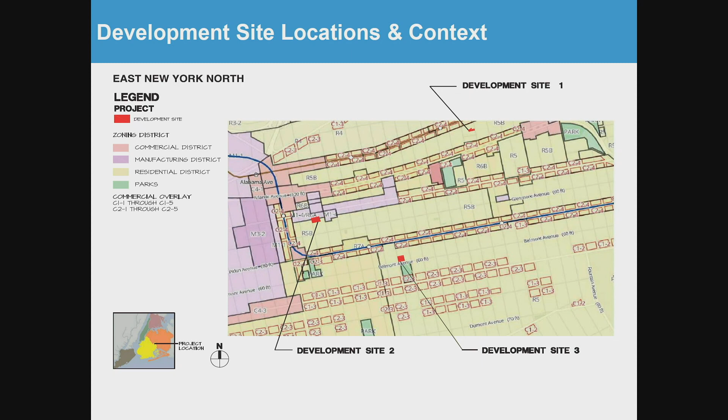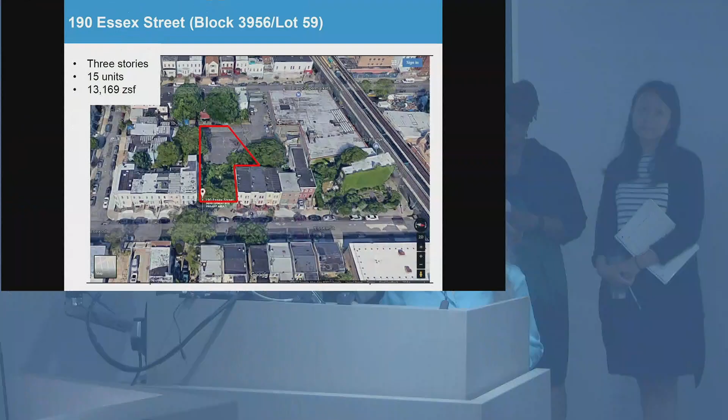This is an aerial view of the first site at 190 Essex, at Fulton Street, and we would build 15 units in a 3-story building. The zoning area is just over 13,000 square feet.

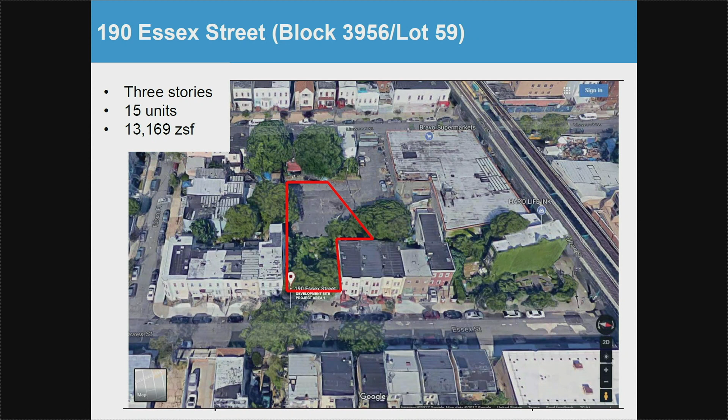This is our site plan, and you'll see that there's a backyard area for resident use and 2 courtyards that will allow for nice plantings, and the backyard will be reserved for resident use.

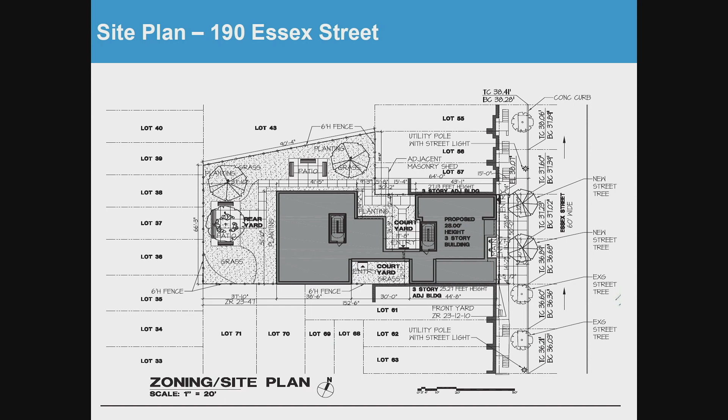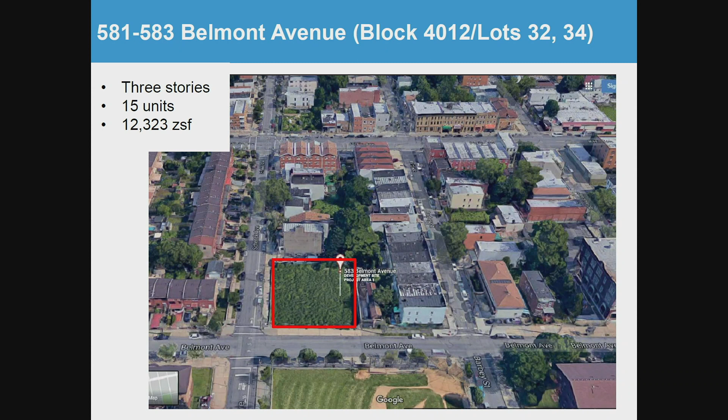The next site is at 581 Belmont, at the corner of Schenck. Also a 3-story building, 15 units, and just over 12,000 zoning square feet. Here's our aerial view. We're proposing 8 one-bedroom and 8 two-bedroom units.

Here's our rendering. You'll see it's set back a bit from the street with some planting areas and a ramp up to the main entrance, which is on Belmont.

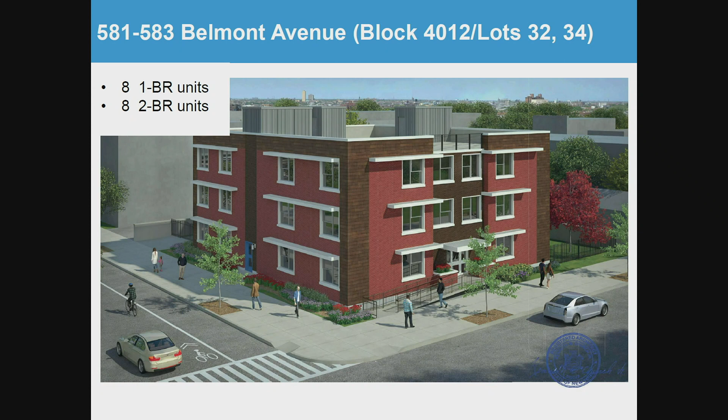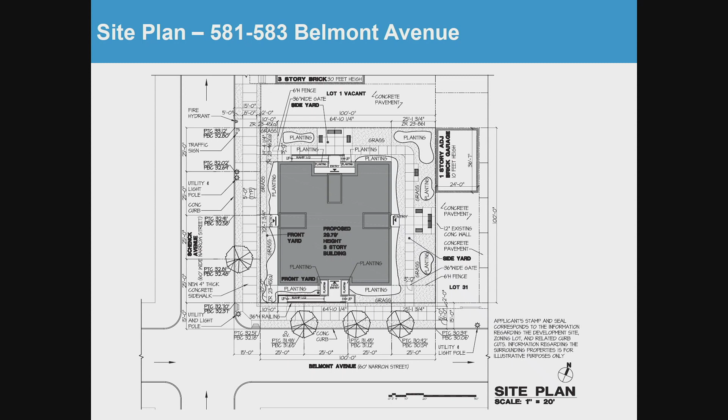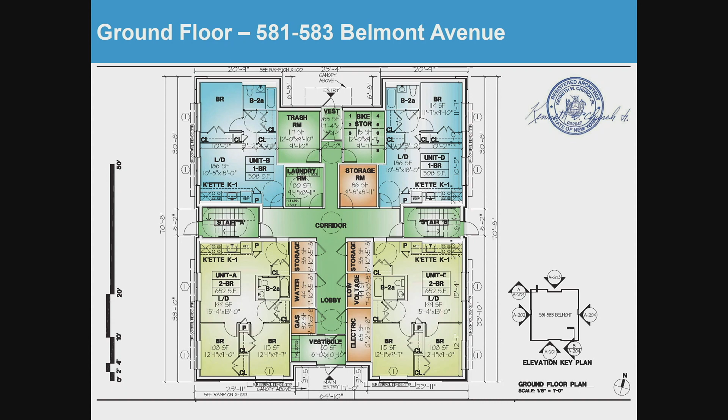Again, the main entrance you'll see is off Belmont, and then there's access to the backyard through a separate entrance at the north end of the building.

The third site is on Vermont Street between Liberty and Glenmore. This is the aerial view: 11 units and just over 10,000 square feet of zoning floor area.

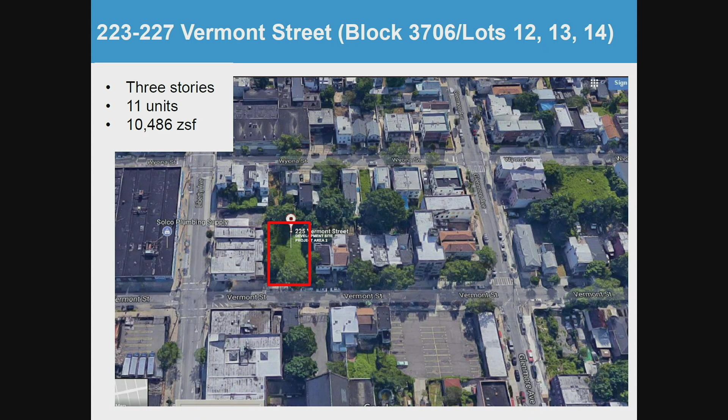This is our rendering: 5 one-bedroom units, 6 two-bedroom units, and you'll see that the building is set back a bit from the street, with some plantings in front of the building to create a bit of a buffer.

The site plan is shown here. The main entrance is on the south side of the building, through a pathway from the street, on the side of the building. There's also an entrance in the middle of the building leading back to the planting and backyard area for residents' use, where there will be plantings and so forth.

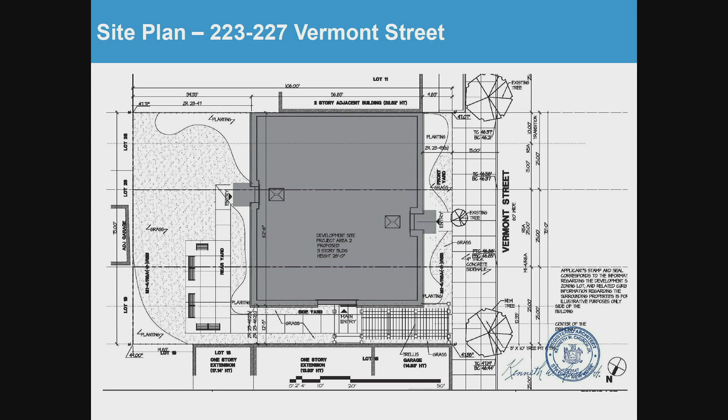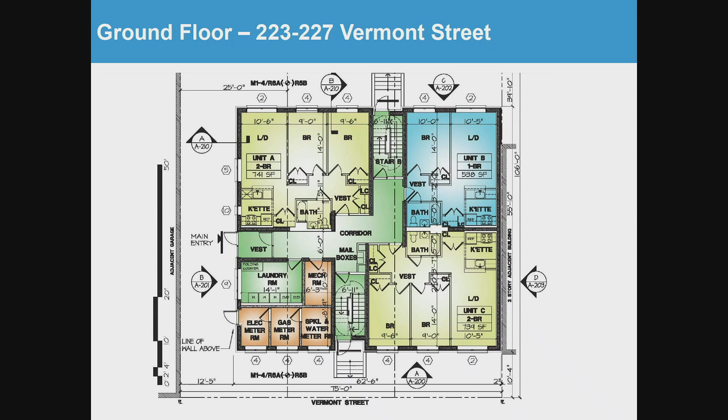Here's the ground floor. You'll see that there are utility rooms, a laundry room for residents' use, 3 residential units, and mailboxes. Again, the entry is on the side of the building, on the south side, and there's an entrance to the rear yard at the back of the building.

Our proposed program is 22 one-bedroom units, 19 two-bedroom units, plus a two-bedroom unit reserved for the super. We serve a range of incomes. All of the units will be affordable, with just over 10% set aside for homeless families, and the rest of the units will serve families between 30% and 70% of area median, with the vast majority below 60%.

The incomes range from units affordable to families at $21,000 and change up to almost $75,000 and change, from the one-bedroom unit at the low end of the affordability range up to the two-bedroom unit at the highest range. The rents start at $481 for a one-bedroom unit at the low end, up to $1,500 and change for the two-bedroom at the high end.

We're hoping for ULURP approval this summer, and assuming that's the case, we would close on the construction financing this fall and start construction straight away. We anticipate rent up and completion of construction in about 2 years. With that, our team would be pleased to take any questions from the commission.

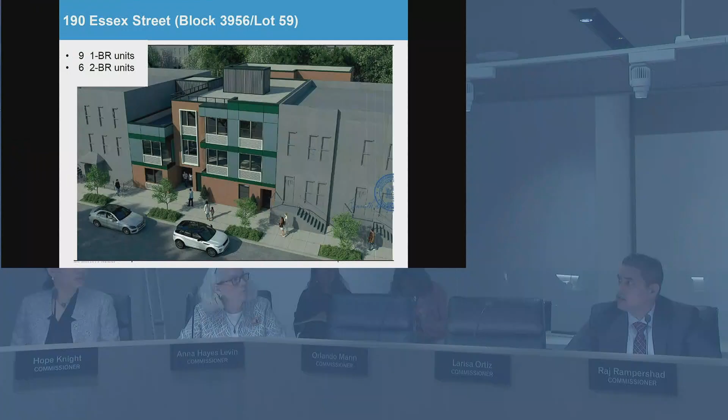I'll turn to Ken. Did you hear the question? On 190 Essex, yeah. Please introduce yourself. I'm Ken Church, the architect. That's probably just a discrepancy between the plans and the site plan that hasn't been updated. There's going to be 32 feet between the windows, so we can use that for light and air.

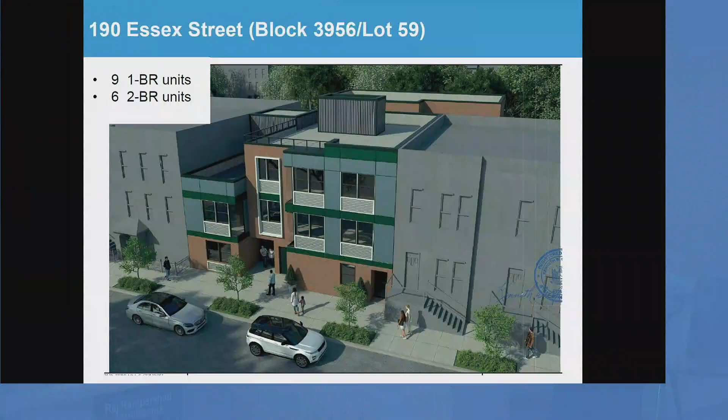One last question. On Vermont Street, on the rendering, I noticed there was no stair bulkhead. Is the stair going to go to the roof? The stair will go to the roof on both sides. Okay, the rendering just didn't show that. No problem, I'm sorry, Vermont Street got redesigned recently. There is no stair bulkhead, just a roof hatch. Because of the height limitation in that district, we weren't allowed to put a stair, so we just have a hatch from the 3rd floor.

Thank you. Commissioner Burney: Just a couple of questions for the architects. I notice, with the exception of Essex Street, the buildings are set back and have these 10-foot planting strips in front. I noticed these planting strips are never successful - they're not maintained, they die, the grass isn't maintained.

With Essex Street you've got more of a hard paving solution. I wonder whether that isn't more advisable here rather than trying to maintain grass and planting. We can integrate some hard paving into the front of those buildings. What happens is typically people like to walk on that area, and we're trying to buffer between the windows at the street level, but we can put in some hardscape. It's really not that people walk there, but their dogs poop there, you know how it is.

And second, it's not entirely clear what the facade materials are here. Anything that's colored - in this case the yellow and the blue - are insulated metal panels. It's a rain screen, and it's masonry on the bottom, brick. Most of the buildings are metal panel or brick. Belmont has a wood-looking metal panel and brick, and Essex is also metal panel and brick.

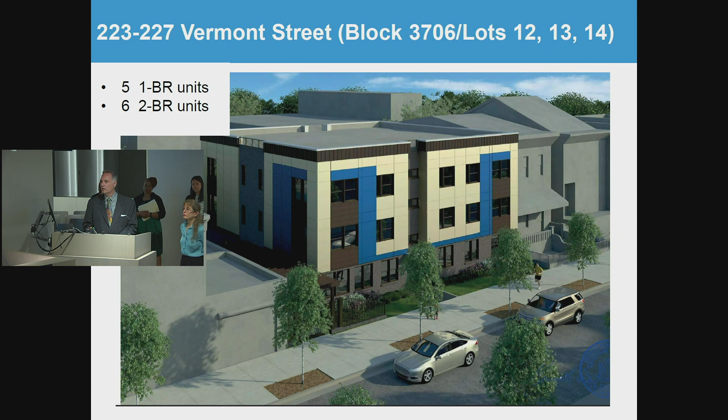So we gave them a quieter backyard experience from their windows. Commissioner: Are you concerned at all about the safety aspects of having the main entrance on the side of the building? It's kind of going down a dark alley—will it be lit? Yes, absolutely it will be lit. There'll be a gate with an access system, and of course there are cameras nowadays for everything.

Okay, and then just a development team question. I'd be interested in some background on the team—what kind of work you do, other work you've done in the neighborhood. Just introduce the people and the companies involved. Yeah, I'll answer for two of the members, and then I'll invite Sheila Bennett up, who's our third and very important member. It's always nice and informational for us to know who's working in these neighborhoods and how the landscape looks.

Absolutely. So the first team member, the Markel Group, is a developer/general contractor. They've been very active in Brooklyn, having completed two affordable projects there, as well as some market rate projects and a bunch of medical space. They've been active outside of New York City as well. And I'm with M. Lappin and Associates. We're also a managing member, and we do some development and some consulting. Prior to M. Lappin and Associates, my partner and I were with the Community Preservation Corp. Mike Lappin was president of CPC, and I was on the development side of CPC Resources.

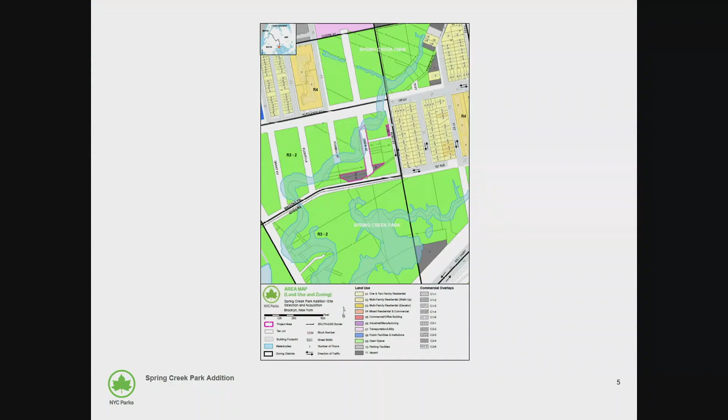This map will give you an idea of the scale of the project. Most of the slide includes the Spring Creek Ecological Restoration Project, and you can see the privately owned parcels for acquisition up in the upper right-hand corner. So with these public benefits in mind, Parks and DCAS are requesting the City Planning Commission support for this proposed action, facilitating the acquisition of unimproved, privately owned parcels to be included and preserved as part of Spring Creek Park. I'd be happy to answer any questions you have.

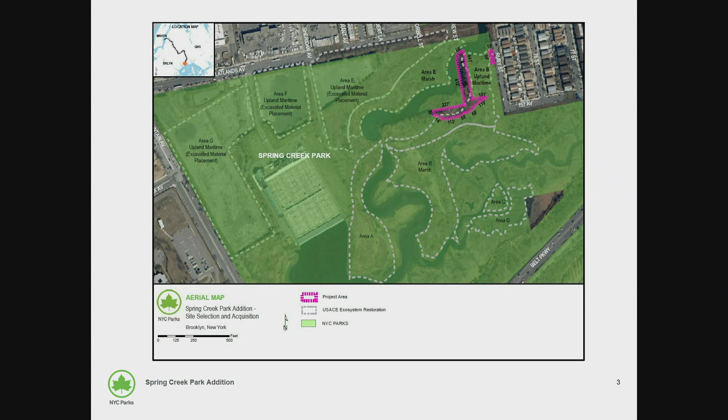Questions from the commission? Thank you, Mr. Tai. And any questions for Mr. Lopez? Okay, those are the only speakers who have signed up to speak on this item, but if anyone else is present and wants to speak, please come forward. The public hearing is closed.

Borough of Queens, numbers 22 and 23, Kew Gardens Hills rezoning, CD8. Number 22, C190299 ZMQ. Number 23, N190301 ZRQ. Public hearing in the matter of applications for zoning map and zoning text amendments concerning Kew Gardens Hills rezoning.

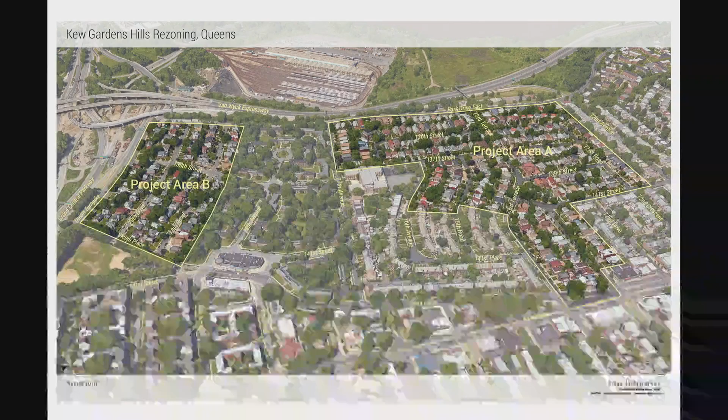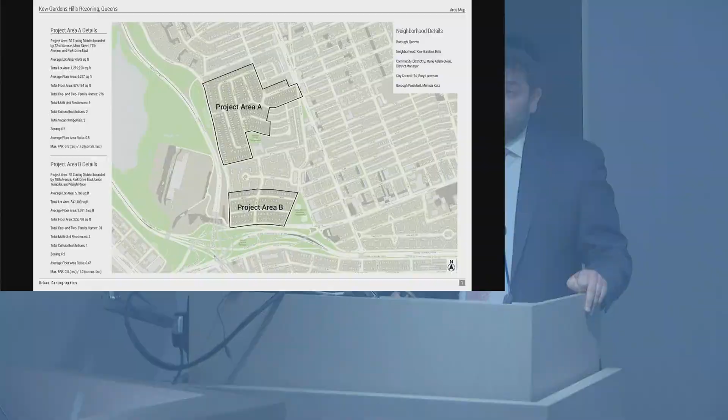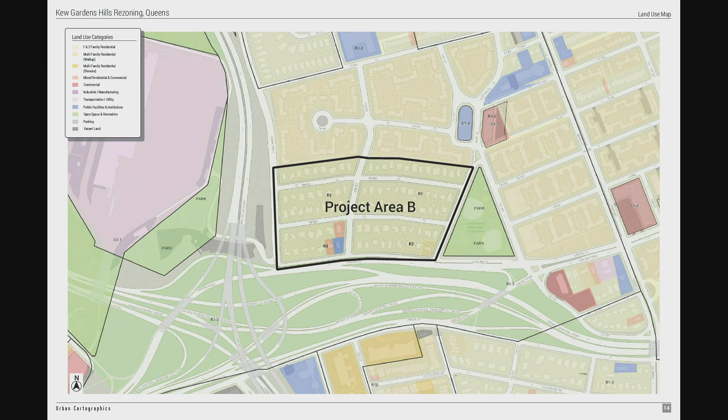Our first speaker is Jay Goldstein. Good morning, my name is Jay Goldstein. I'm here on behalf of Community Board 8, as well as the community at large, which is the subject of this rezoning application. The rezoning before you today encompasses two project areas within the Kew Gardens Hills neighborhood of Queens, Project Area A and Project Area B. Project Area A is loosely bound by Park Drive East, 72nd Road, 77th Avenue, and 137th Street. Project Area B is loosely bounded by 78th Road, Vleigh Place, Union Turnpike, and Park Drive East.

As you can see, the area is heavily accessible to mass transit. There are express buses along Union Turnpike to the city, subways to the city, as well as local buses which get you to Jamaica Station and all throughout Queens. The proposal before you would be to take the existing R2 district to R2X. There are 377 lots within this area. When I was brought into the project, I was asked to come up with a way to allow these homes to be enlarged while maintaining a single-family district.

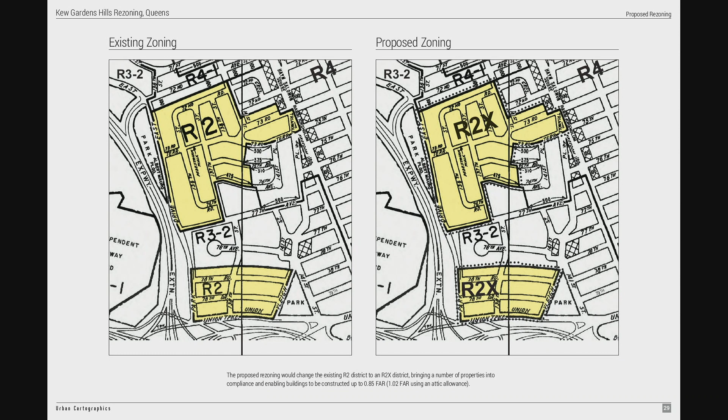They wanted to keep the single-family nature of the area, but allow for a larger footprint of the properties and an increase in floor area. The R2X does just that.

The R2X, while maintaining similar front yards and requiring it to be a single-family home, does allow for an enlarged footprint, which with a 20-foot rear yard as opposed to a 30, and allows for a 1.02 FAR with attic allowances. The major difference is the R2X actually requires a lower home, so the homes would have a shorter height

than is currently allowed, which is currently governed by the sky exposure plane above 25 feet. The R2X would require you to limit the height at 35 feet above, and the front wall would be limited to 21. So we're keeping it as a single family home.

We're keeping the heights to a low level that are more consistent with what's been in the area and what will be in the area. The homes, a lot of them predate zoning. With this rezoning, approximately 98% of the homes in the area would benefit from the project in some way, bringing them into compliance or allowing them to enlarge their homes.

Again, this is a project that was spearheaded by the community members and then taken to the community board, and the community board took it upon themselves to present this on behalf of their constituents.

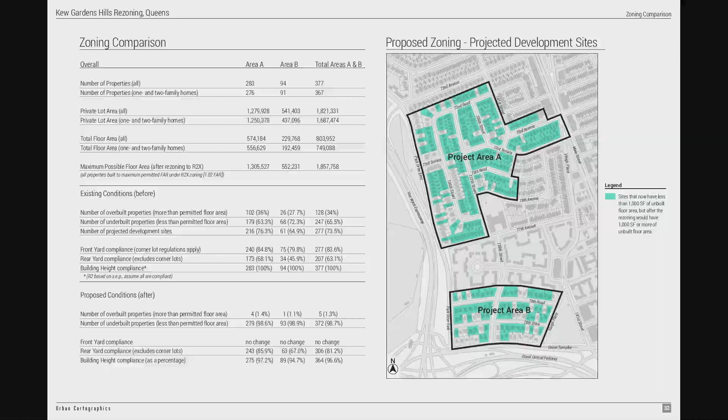If you have any questions, I'm happy to answer them. Questions?

Commissioner Levin: I just have to say it's unusual to see a community board as the applicant, particularly on a project like this, and I don't know if you're the right person to ask this question. I'm interested to know a little bit of the narrative of how this came about and what the process was in beginning to engage all the people you have to engage with to get to this point where everyone says, oh, it's wonderful, because I know those things don't always come quite so easily.

All right, so I am the person to ask. I grew up in the neighborhood. I'm a Queens resident for my entire life till I got married and moved to Long Island. My brother lives within Project Area A. Most of the people I went to high school with and elementary school with live in these areas.

So being one of the few zoning attorneys in the city, they were looking for a way to enlarge their house. I was getting phone calls daily: how do we do this? What do we do? How do I get a bigger home?

We put together a number of, I wouldn't call them town hall meetings, but before we got to city planning commission, city council, and the community board, we had meetings in people's homes, just open to the public. Come, let's discuss it. We put together a presentation, we explained the project, and this was funded by the residents of the neighborhood.

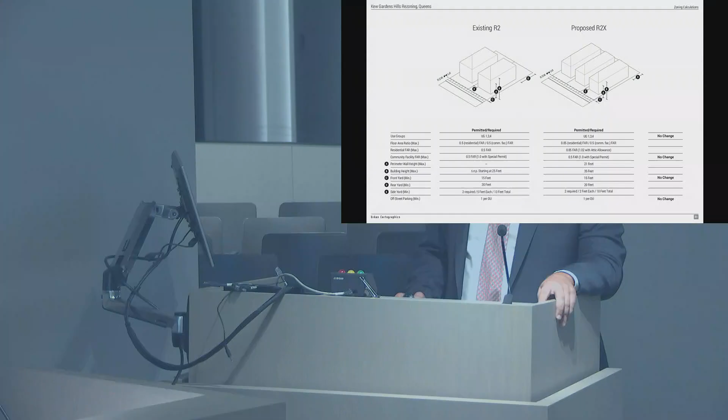Commissioner Edie: Just curious, you showed a couple of images of homes that have been enlarged. If I understand correctly, those were enlarged under the existing R2 zoning. Correct. Do you have any images showing what could be developed under the R2X? If you look at the top of this photo, it gives a rough massing of what the R2 would look like versus the R2X. The significant difference is that the R2X allows you to go 10 feet extra into the rear yard, and it's a shorter building than the R2 allows today.

And also, if I understand correctly, you can do it on a smaller, narrower lot. You can, but we don't anticipate that because this project was not spearheaded by developers wanting to take mass tracts of land and subdivide them. These are existing lots, maybe 30 to 40 feet wide. I don't anticipate someone buying up 3 lots, subdividing them into 2 or 3, and building new houses. The R2X also lets you reduce side yards from 13 feet to 10, but you still have to maintain 8 feet between houses. Given those regulations, we don't anticipate seeing that type of enlargement—the enlargement we anticipate is really into the rear yard. Okay, thank you.

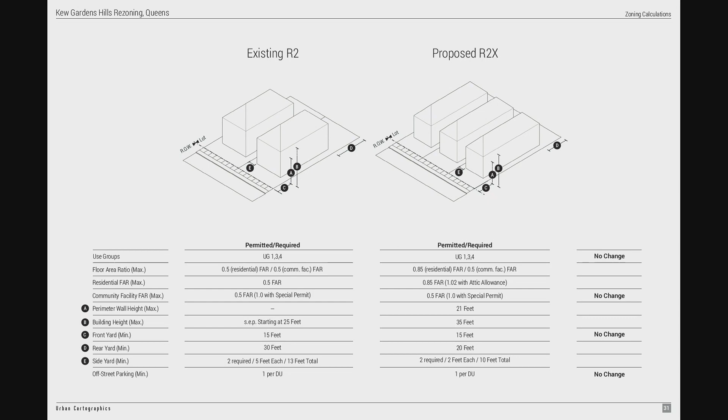Other questions? Commissioner Levin: This is really an aside, but I think we should note that on the front page of today's New York Times is a very detailed story about how many municipalities are now reconsidering single-family home zoning. Not making a pitch for it to happen here, but the record should show we're not unaware of the emerging debate going on nationally about the role of single-family housing in the production of affordable housing.

Exactly right. It's an absolutely fascinating article, particularly because it shows major cities throughout the U.S. and what percentage of their land is zoned for single family. It goes from New York City at 15%, I think, to 70% being the next closest. Thank you.

Our next speaker is Aviva Tropper.

Hi, good morning, my name is Aviva Tropper. I'm a resident of Kew Gardens Hills, and my husband and I own a home in the rezoning Area B. I'm a third-generation resident in the neighborhood. My grandparents moved into the area in 1962 and 1979, but many other relatives and older relatives of all generations live there too. I attended schools in the area, grew up in the area, and my friends live in the area. We would really like for friends and ourselves to be able to continue raising our families in this area. The way the zoning is now, it's really not productive for us—we want to be able to enlarge our home and make it more family-friendly, with a larger dining room, larger bedrooms, and more space for our children. So the community has come together to support this plan, to be able to stay in the neighborhood and keep friends and family close.